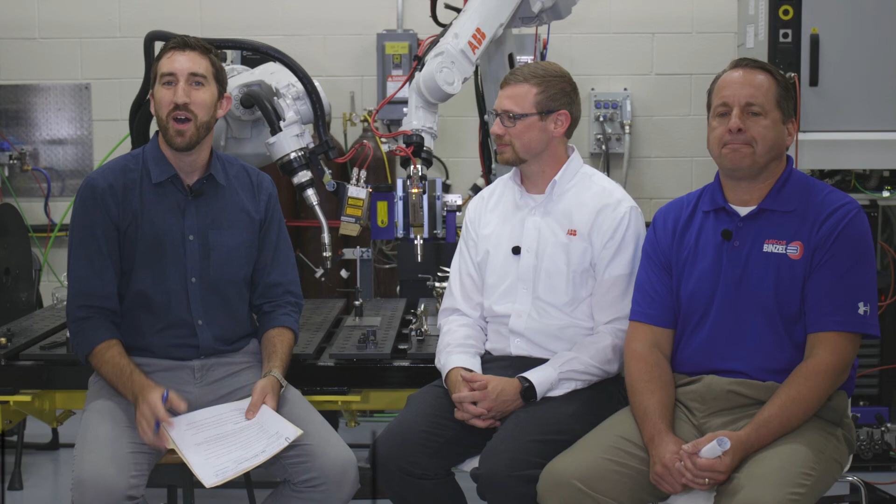Matt, tell me what's new for ABB's arc welding robots. These next few years are going to be really exciting for us. We've got a lot of great new technology coming out. First and foremost, new controllers, a whole new design. There's a new compact controller, a new rack mount controller, and a new full-size controller all coming out relatively soon. All the release dates are on ABB's website. These new controllers are going to be more powerful, more compact, and have a lot more open framework, so there's a lot of opportunity to expand into markets we haven't gone into yet.

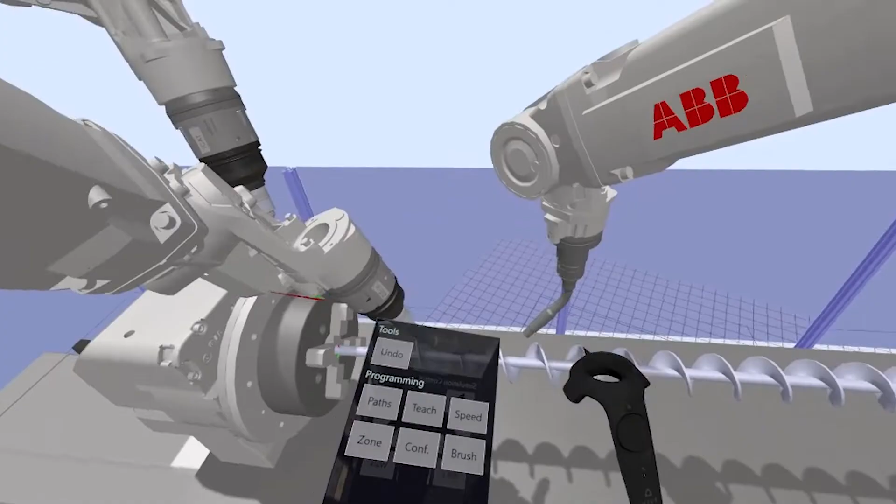The other thing is we're doing a lot with virtual reality. We have a new arc welding power pack on top of the new Robot Studio we're coming out with. This new arc welding power pack 2 has a lot of capabilities with virtual reality, so we can do virtual reality and augmented reality with any of the different types of headsets. One we use here quite a bit is the Oculus Rift. We've seen customers put on a virtual headset and walk around in a simulated cell, seeing the robots moving, the parts moving, and what the load height will be for the operators - that's a huge advantage for the future.

That sounds really cool. It really sounds like what you guys are gearing towards is tomorrow's welding automation and how people are getting into the workforce now in manufacturing. Right, exactly. Factory of the future - that's really where it's at with us.

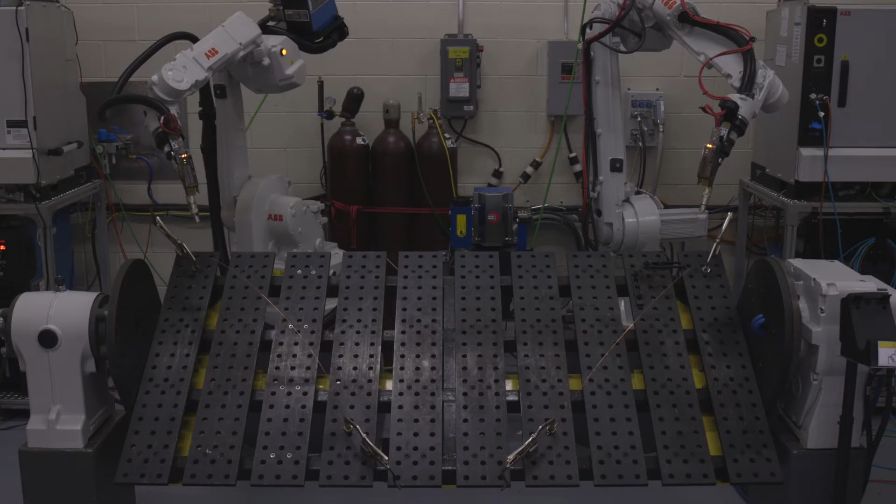I want to ask one more question before moving to Tom. What is it about ABB Robots that makes them unique and differentiates them in the marketplace? There's a few key points, but one of the huge ones we like to boast about is accuracy and repeatability - that's a huge deal for us. We do that better than anybody else in the market, if you ask me. Some other key areas we do really great on is longevity. When you go out into the field, there are many robots out there that are 15, 20, 30 years old, still in production, still running, and still very good robots. It gets harder to find people to program those robots at this point, but even today our robots are very robust for industrial use.

Thanks so much, Matt. Want to move to you - talk about ABB and Abicor. What makes ABB welding robots such a great fit with Binzel's robotic welding solutions?

Well, I think a lot of it comes down to a very nice selection of arms, a strong offering within the arc welding segment, which is where we really operate. We also have them integrated into a number of their heavier robots for laser welding applications. Very high-end controllers, a lot of features and functionality, especially with the integration of seam tracking sensors - a very solid package from that standpoint. And again, the global footprint - being a global company ourselves, there's a lot of opportunities from Europe into the Americas for us to work together. It's a really good combination.

Sure, really important, especially in today's manufacturing landscape, with communication, the rise of the internet, and how communication passes country to country, language to language. Having that global footprint is obviously really important for companies - the world's getting smaller from a business standpoint.

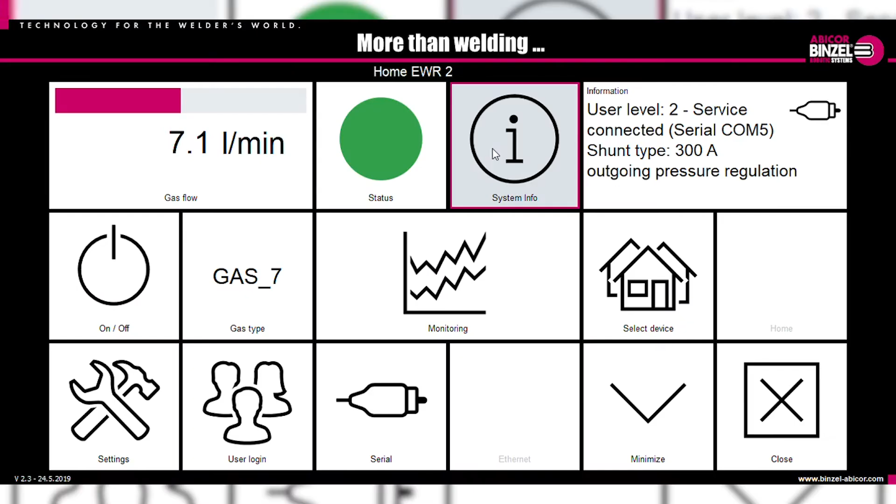Software suites that are supporting things like our gas saving sensors, our wire feed systems, seam tracking sensors, to really help increase throughput and decrease a lot of the rework going on.

We're also looking at bringing inspection sensors into the market for doing profile measurements and things like that, which comes back to getting data into the customer's hands. That's the big push, I think, where we're going - getting more intelligence into the welding process, so people can make good decisions from those pieces of data that they provided.

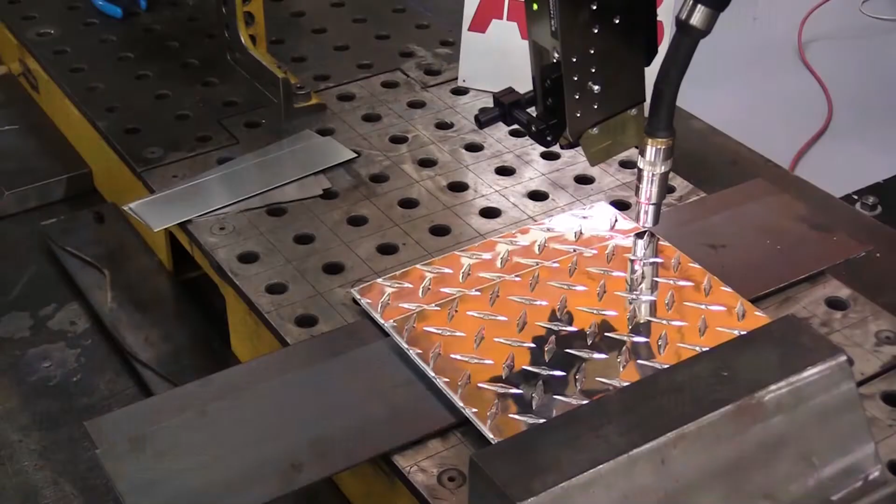Let me ask you, what are some of the Binzel product solutions that you think the ABB works especially well with? Well, obviously the seam tracking sensor. With the way that they manipulate the data, it's a very stable process - been very impressed with that.

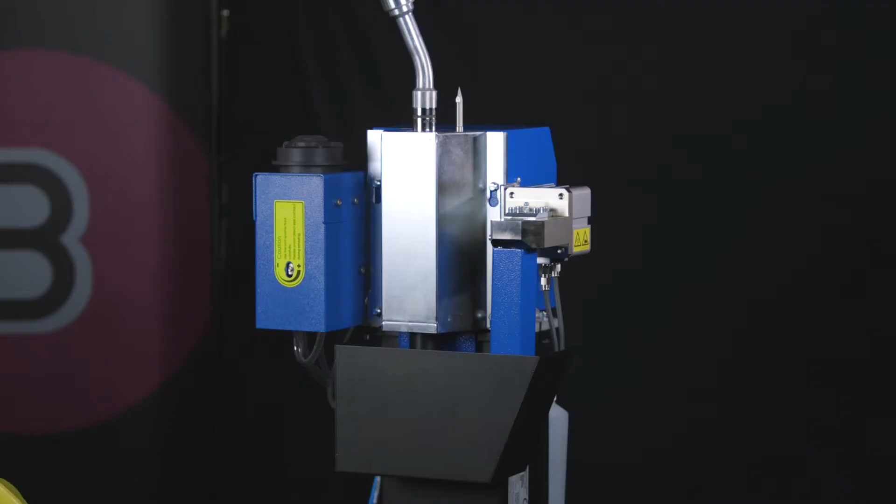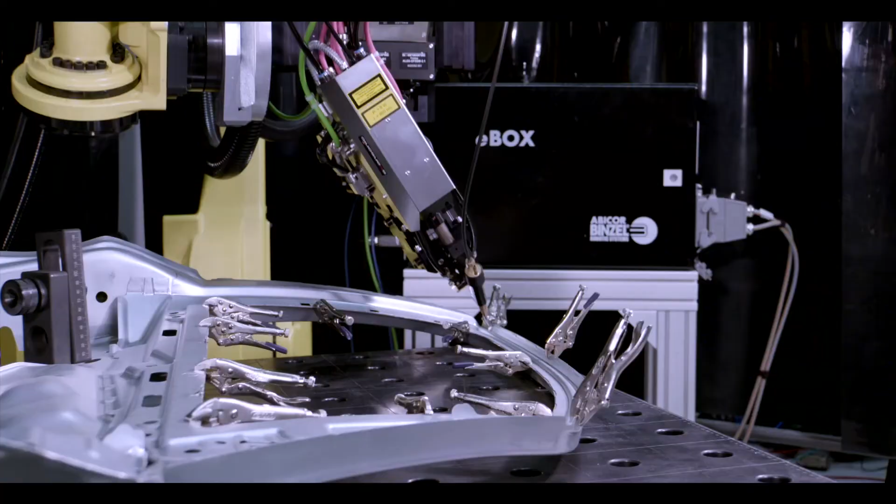But we've also worked with ABB across multiple lines and applications on the arc welding side, from peripheral products such as our torch reaming stations to the torch products to laser optics. We're partnered with ScanSonic, doing ALO 3s and remote laser welding. There are customers out there using these on ABB robots globally, working very well every day.

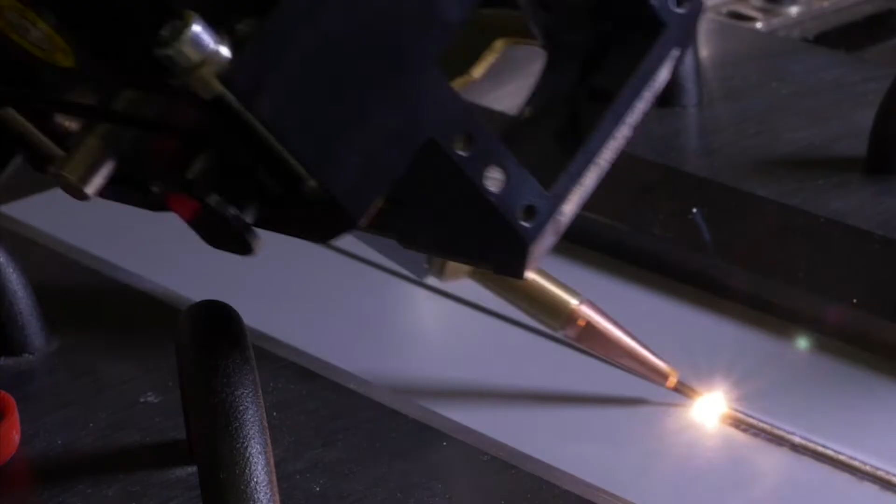You mentioned remote laser welding. ALO 3 is a tactile seam tracking for laser brazing and for laser welding. We're actually using the wire to track the joint. Everything's driven through field bus communication through the robot. Very stable process - thousands of these ALO 3s are out in the market, a number of them still loaded on ABBs.

Where does ABB see the future of robotic welding needs, and how are you guys preparing to meet those challenges? Talking within ABB internally, where we really see the future going is, first and foremost, offline programming. Offline to online programming, we do an amazing job at - taking what you program in the virtual environment and getting that into the robot. That used to be very complex.

In order to do that, we're working very diligently at simplifying that process. We're making it very simple to take that offline program, get it into the robot, and get it as close as possible to what you need in the real world.

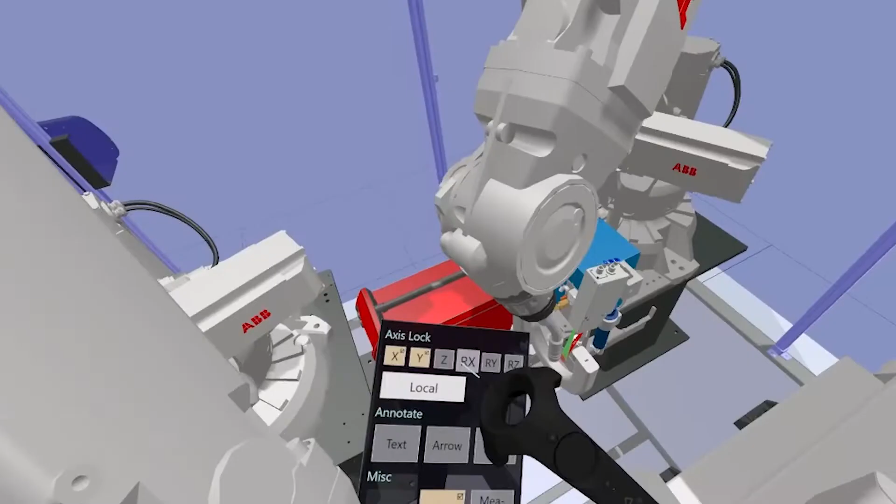And how we're doing that is through RobotStudio. So now with the addition of virtual reality, it makes it even easier. I see guys actually walking around and programming welds in virtual reality. You can actually see the robot movement, interact with the robot, interact with the parts. It gives you that opportunity to be more immersed in the world, other than just looking at a flat screen.

You know, up and beyond that, what we're seeing is just like everything else out in industry: price is key. One of the things we're seeing more and more is the price of laser coming down. And as that price comes down, we see more opportunity for others to use it, which gives us the opportunity to get more adventurous with it also.

Especially the laser market, as Matt noted, the cost per kilowatt has gone down dramatically in the past 10 years. That, on top of the adoption of those processes into the U.S. market, has really given a much more prevalent spot in production, especially for additive manufacturing and 3D printing.

We're getting into laser hardening and cladding. We're doing brazing, you're doing welding. Absolutely, the evolution of lasers into production - it's here.

How does Binzel see the future of robotic welding needs, and how's Binzel preparing to address those? It comes down to information. Again, we talk about Industry 4.0 and data - it's providing data around the process.

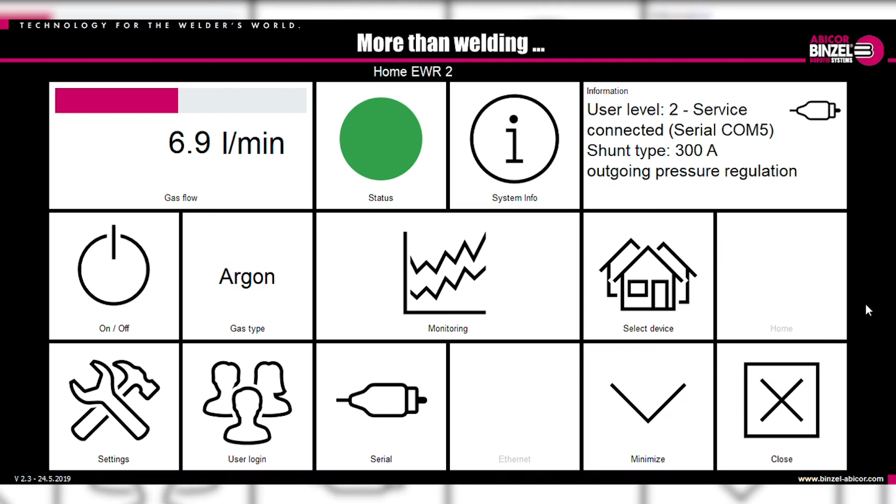A lot of our products now are going to be coming with their own software suites, so you can do setup remotely with them, you can monitor them offline. Anything from gas flow to wire feeding to the whole gamut of things we get involved in - that's what it comes down to: data, data, data.

And I think that's going to be the big push for us, having more intelligent solutions to really help improve day-to-day production. Great, and I think that's where we have a great relationship with Binzel, in the aspect that we're developing very powerful controllers. We have a very powerful controller right now, and we're going into the future with a new OmniCore controller.

But as he's saying, the data - the more data we can give the robot, the more it knows, the more it can handle different situations. With our newer, more powerful controllers, we're going to be able to take in more and more, which I think is going to be a huge key factor in the future.

And also just the more open these interfaces are between each other, able to talk to one another very clearly and relay that information, and then be able to apply it actually in the process itself, right? Yep, for sure, absolutely.

And again, the speed of communication - that's another critical point of having faster processors and faster ability. We've had issues, again with the TH6, where you're providing so much data - are the robot controllers able to capture that data and respond accordingly?

And it's funny, it's like a race - the data flow keeps coming, the robots keep getting faster and faster, no different than PCs or anything else. Evolution - so more data, faster.

With this sensor, we call it a 6D sensor for a reason - we provide X, Y, and Z information along with roll, pitch, and yaw. So there are capabilities with a more open platform to get into the true depth of the data that thing's providing, and be able to handle the variations as a part comes. You're not just looking at X and Y or things of that nature - the ability to handle a larger data stream, I think, has a lot of opportunities.

With TIG welding robotically, it's never been a strong market - people have shied away from it. It's just a matter of having the right tools in the tool bag to do it properly, and I think there's some definitely good opportunity there as well into robotic TIG, along with all of the different MIG welding solutions we've been working on with these guys. Yeah, absolutely.

TIG welding definitely is one of those things that's been a hot topic as of recently. TIG welding is more known as a manual welding—a guy sitting there welding day in and day out. These parts can range from parts that vary a little bit, to parts that are relatively secure and repeatable. Those secure and repeatable parts are the ones we're really looking at, to say hey, this is a great opportunity with different torches from Abicor Binzel to utilize and robotically weld these solutions.

And the ones that are a little bit more complex, we'd look to use a TH6 on them and win some of these applications that normally are done manually. The nice side is that whether it's autogenous, i.e. no filler metal, or there is filler metal required, we can help on both sides. So that's one of the nice things about the Binzel TIG torches—the cold wire and hot wire feed capabilities, along with standalone wire feeding solutions. So a lot of good opportunities on that front.

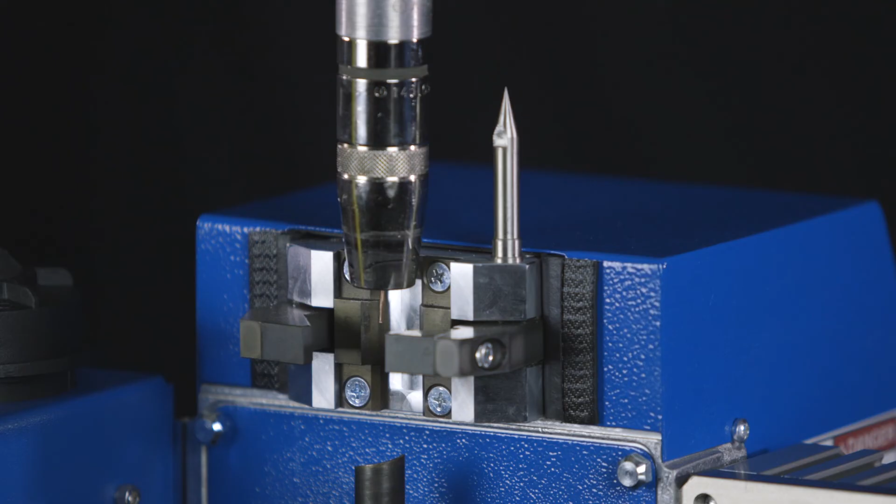What are aspects of Binzel's robotics solutions that ABB particularly likes? I would say the one we use the most on a daily basis is the torch cleaning center. It's done a great job. It's very robust, reliable. We use it in many of our FlexArc cells.

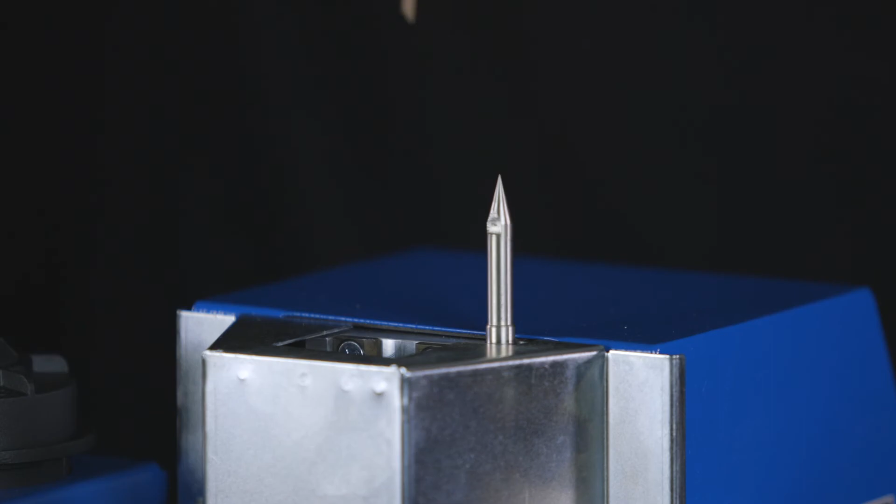Beyond the torch cleaning systems, the TH6 is a staple in our tracking. When we find hard to track or on-the-fly tracking that we can't solve with another solution, the first thing we're looking at is, okay, is this a laser tracking opportunity? And usually that is the first one we default to.

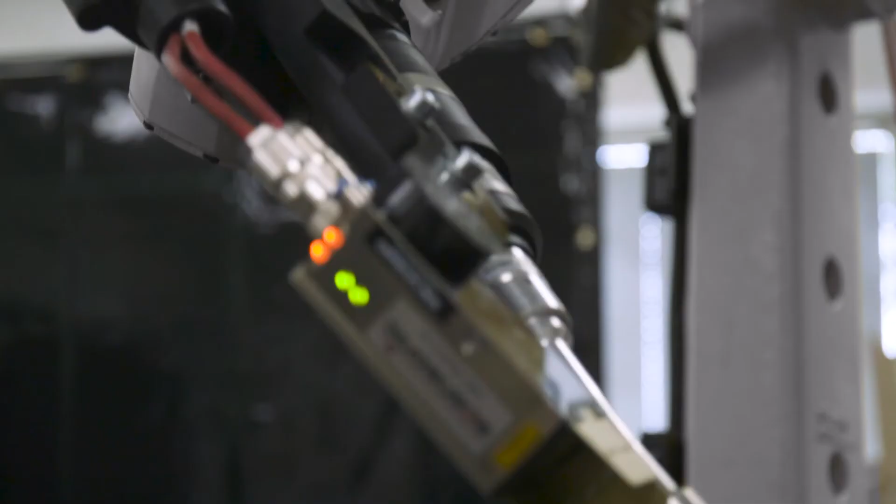We really like the product. It integrates well, and ease of use is important for us in that aspect. I can point out as well, the integrated solution for mounting to the Binzel torch package makes it easy as well. And that's key for us, because we want to efficiently set these robots up quickly.

Abicor Binzel has done a great job at developing these torch mounts, and it's a standard product for them, which we go back to for service. If something were to happen to one of these, it's very easy to reach out to an Abicor Binzel rep and have one replaced very quickly.